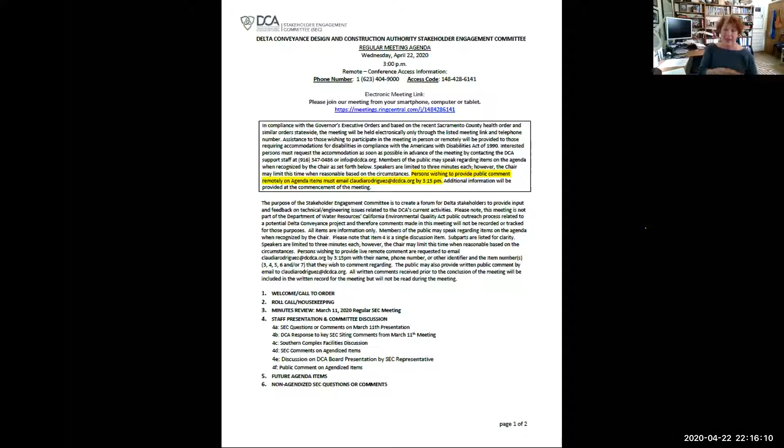Okay. So if we get consensus on leaving the agenda as is, I'm assuming we do, unless I hear anything other, then let us ask, and also just as housekeeping, normally around this time I say the bathroom is that way and the exit is that way, but I think you guys know where that all is better than I do, so we'll leave that.

At any rate, I'll ask Carrie to address the timing of the CEQA process and the related engineering design. So Carrie, take it away.

Hi, can everybody hear me? Yes. So I guess I'd like to start by just saying it's good to see everyone, even remotely, and I hope that all of you and all of your families are staying healthy.

To start this, I'd like to just go over a quick environmental update. The scoping period closed last Friday, and we have started to work to process the nearly 800 comments that we received. Our next step is to develop the scoping summary report, which will summarize the feedback and provide copies of all of the comments received. We plan to post this report on our website when it's finished in about 2 months.

Another issue I wanted to touch on: Director Nemeth, Secretary Crowfoot and Governor Newsom received a number of letters requesting that planning or public outreach efforts for Delta conveyance pause during the COVID-19 pandemic. They have indicated that it is important to them to continue critical water planning efforts during this time, including Delta conveyance. However, they also understand the difficulties of public interaction during this sensitive time and that staying healthy is everyone's priority. The public health situation is pushing us to be more creative in our public involvement efforts.

We know that all methods of reaching the public are likely to be difficult for some people, so we're trying to use a broad range of options to reach as many people as possible. It is our hope that these methods will help improve communications and open new avenues for engagement. The next opportunity for formal review and comment on CEQA is unlikely to be sooner than early 2021, and in the meantime, we're open to your public engagement ideas, and we'd welcome your input.

Glanville. So there was quite a bit of discussion on what it is that we leave behind from these sites. So I wanted, do I have this? Yeah, okay, sorry about that. Okay, so I wanted to start with Glanville Tract as an example of the discussion. This is one of the major sites, and hopefully this provides some food for thought on some follow-up work that we'll do in the next meeting. So this slide here shows the full utilization of the Glanville Tract. If you recall, this is a launch shaft site.

And we selected this site because of its proximity to a rail spur. And by using that rail, we're going to be able to get the tunnel liner segment traffic off of I-5, and we'll be able to use it to move RTM material around the Delta. So we really liked the reduced effects of this site. And then the launch shaft was on the other side of I-5, and we had the idea of a conveyor to link the RTM production from the launch site over to the Glanville site, where we could process it, sample it, dry it, and stockpile it. And a lot of that material will swing to the south down to the southern forebay to help build up the embankments.

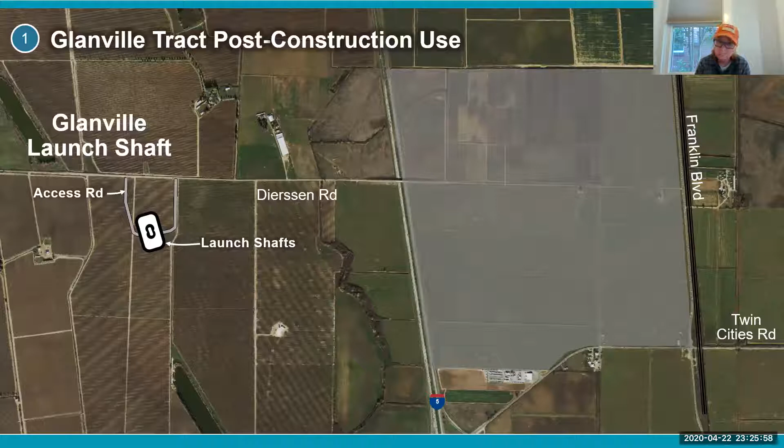Okay, all right. Just one more thing: I think the entry point of the Delta would be Freeport, near the Cosumnes.

I'm sorry, I think you broke up there. Can you? Cosumnes, yeah. Okay. Okay, good. And I see that Dr. Lytle is here. So Mike, have you been able to come up? Mike. Okay, so we're gonna go to Dr. Lytle, and then Anna.

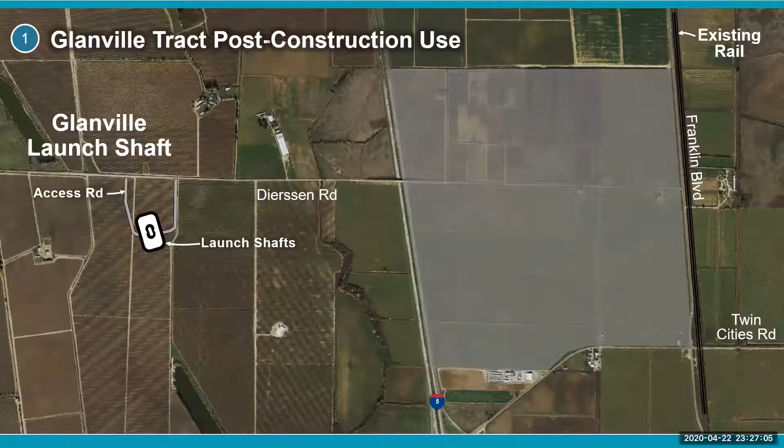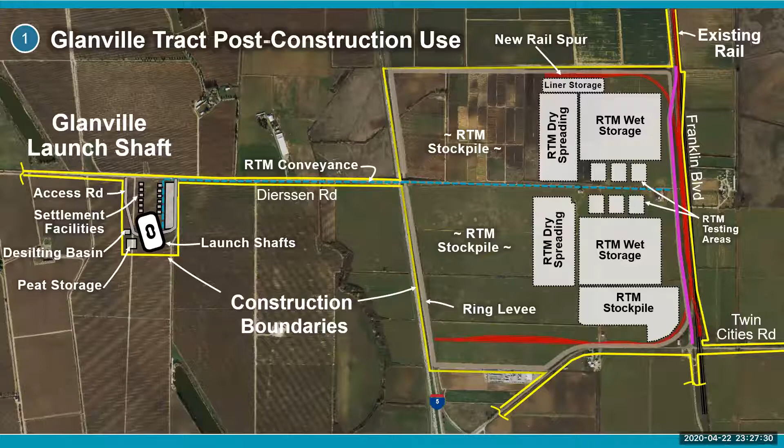Good afternoon. Just one question regarding this Franklin Boulevard site. I'm just wondering if you've been able to determine how you're going to accommodate flood control risk for that property, particularly along the Twin Cities Road over I-5 and further to the west. Yeah, if we go back to this slide here, you see the ring levee around the perimeter. Okay. And just so you know, during the 1986 flood, I-5 at that location flooded. Big time. Okay. And then Anna.

So as we know, the Delta Protection Commission is working on the National Heritage Area, and I feel concerned that they are not being consulted or made a priority on decisions like visitor centers, since that sounds very much like what the heritage area has been assigned as duties. So my suggestion is that we don't live in a bubble and we realize that there's other things happening in the Delta that coincide with the planning of this project, and that we should really be making sure that it aligns with things that they have planned. Wouldn't it be silly to have two visitor centers on top of each other because you didn't talk to the agency that is overseeing it? Thank you.

Okay. I'm going to try to keep pushing through here. Maybe try to hold questions to the end on some of these. Maybe take one or two on each side if we could, if we can get through this just a little bit faster. I know we got a long agenda here. And I think the star of the show is really going to be the southern facilities. We got a lot of feedback at the last meeting about the use of Hood Franklin Road.

So we went back, and what we are proposing here is to use Hood Franklin Road for the alternative that uses intakes 2 and 3. If you recall, at the 6,000 CFS, which is the proposed project in the NOP, we'll need 2 intakes, and that means intakes 2 and 3 or 3 and 5. So based on the proximity of each of these, we've presented an option to use Lambert Road exclusively for the 3 and 5 option, and then use Hood Franklin for the intakes 2 and 3 alternative. And that's really just to reduce the amount of additional haul road that we need to run from Lambert up to 2 and 3.

So here's an alternative that pushes the construction traffic to the intake sites through Lambert Road. And what you're seeing on this map is the overlay of Stone Lakes National Refuge into the area. So this is reflecting comments that we got on the use of Hood Franklin. Any questions? Yeah, I have my hand up. John has his hand up, yes.

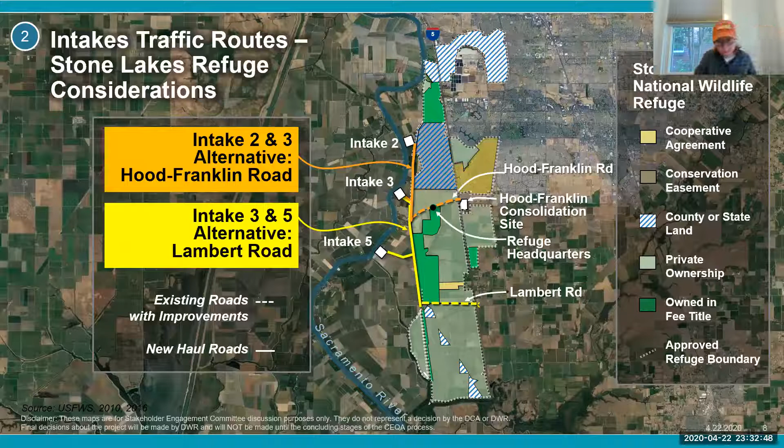Yeah, I think that you covered it pretty well, Catherine. Just as a reminder, none of this is done yet for this phase of the project, but we did consider the idea that if we want to use any of this for tidal marsh habitat, that corner that's on the San Joaquin is what we could use to mitigate effects elsewhere. The rest of the island, based on fish presence, we couldn't move that to another part. It would need to be on the San Joaquin.

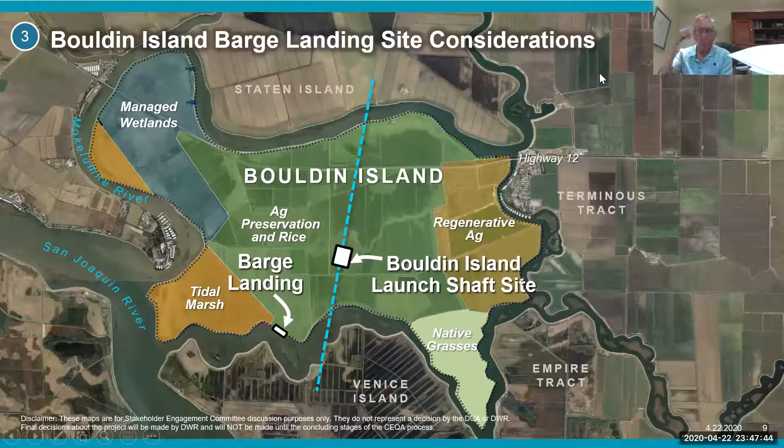Would love to. At the last meeting, there were lots of comments on bridges being raised in the Delta, and just like you all, I've been sitting behind a bridge waiting 45 minutes for it to go up and down before driving off. So this map shows, for the central alignment, the Bouldin Island barge landing. And for the eastern alignment, we have a barge landing down at the lower Roberts Tract. Maybe you remember that from our last meeting in March.

So the three areas where we could conceivably be purchasing the concrete liners from are the East Bay area, the Port of Stockton, and potentially from Port of West Sacramento. All of those areas have existing concrete batch plants that could facilitate the volume we would need. You can see you can get to both landings to deliver the liner material from both the East Bay area and Port of Stockton.

But if the contract was awarded to a firm up along the Port of West Sacramento, you have the Rio Vista Bridge and then the 3 Mile Slough Bridge that would open up on that route to get to Bouldin. There is an option, not shown here, where if it came from West Sac, there's no avoiding the Rio Vista Bridge, but you could go around Sherman Island before you got into the barge landings on the two islands. So I just wanted to present this to you in terms of bridge impacts from the liner fabrication location.

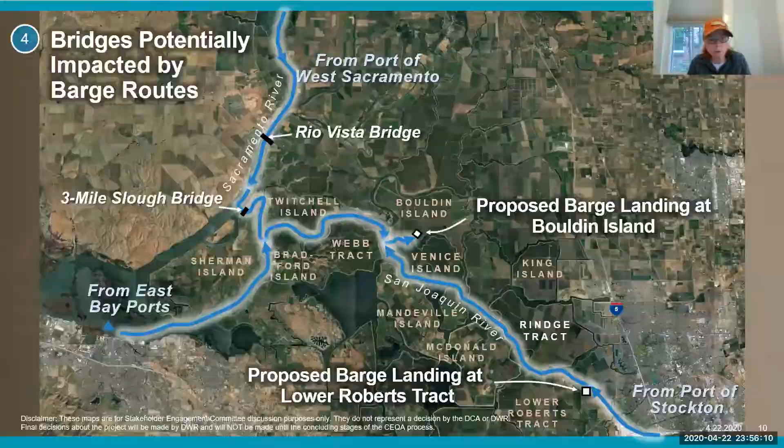Next slide. There was a lot of conversation at the last meeting about where we had sited the shaft on Staten Island. This is a maintenance shaft, so it's one of the smaller sites. It's not like Glanville — there's no RTM produced here. This is a place where the contractor can go down and do routine maintenance on the TBM machine. Consider it like a car tune-up so that it can make the last 5 miles to Bouldin Island.

And where we had located it was on a narrower dimension of the island. Sean pointed out that it would be much better to locate it in a wider area of the island. I'm no bird expert, Sean is, and maybe he can speak to the species, but working with some folks that understand these issues, there was a request to move it. We moved it further north, right along the road, to keep the impact close to the road and in a much wider section of the island.

Sean, I don't know if you want to speak to this at all. Is that the location that I sent you? It is. So the benefit of this location is not only is it in a wider part of the island, but it's right next to a developed area. There's a house there, and that house has some power lines. So it would be the least evil place to put it on the island in terms of impact on cranes. Thanks, Sean. All right, I think least evil is a good way to describe that.

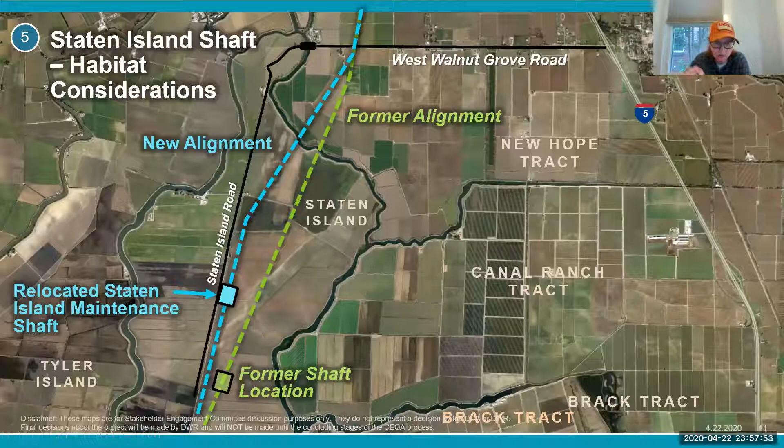Okay, great. And again, this shaft is only on the central alignment. It's not on the eastern alignment.

Then the last slide before we get into the southern facilities, there's been a lot of conversation around the impact to recreational facilities. I don't have much to add to it, but what I wanted to do was take the recreational map that we gave you and overlay the alignment, both the central and the east. You can see it on this map. The circles are used to highlight the names of all the different facilities that are included in the alignment. By overlaying this with the transportation, you can start to formulate in your own mind some of the impact that the construction or the traffic to get to these sites might have on either access or noise or aesthetics to some of the recreational areas in the Delta. Again, I don't have anything to speak to it, but I wanted to make this map available to you.

If anyone wants a full-size print or an 11 by 17 print, we're glad to run into the office and make copies and mail them to your house. All you have to do is send in to Jasmine a request for it. And if there's any maps in general that you'd like to see the overlay of the facilities on, we'd be glad to produce those for you. This one might be a real nice one to add to our big book of maps, kind of pull this stuff together.

Yeah, we do have the rec map as one of the GIS maps that we provided very early on, and then we supplemented it as we added some additional recreational facilities. But what we hadn't done is layer the actual sites on top of any of these GIS maps. So I thought I would tee off that conversation here and start with this recreational one, because it is the one that's brought up quite frequently in these meetings.

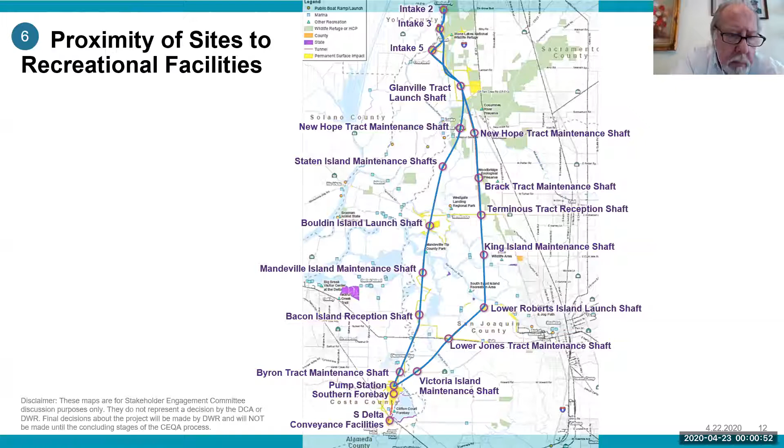Karen is... Yes, this is the recreational facilities map. Yes, this. I'm not seeing the Mildred Island Anchorage area noted. I'm not seeing the local elementary school, which is within a stone's throw. And Catherine knows that I'm very, very concerned, and I can't blow up these maps enough. So yes, whatever I can get in terms of maps, I'd really appreciate.

Yeah, we don't have the school on here. These were recreational facilities. Well, the school's kind of important. I don't know if my grandkids would say that's recreation, but it is for me to get them out of the house, but that's beside the point.

Yeah, anyway, so I see the recreation areas, but you need to be aware that the entire, the only way in and out of Discovery Bay is through that river that this goes right under. And so that's an issue.

Okay, I know that next meeting's maps will be blown up for each one of these sites, so hopefully it'll be a lot easier for you to see some of those. If there's any recreational comments you have on this, again, just send them into Jasmine. Feel free to copy Karen Askin, and she'll double check that she got them. I think she said that she had picked up your comments from the last time and incorporated them in here, so I apologize if we're missing some things still.

And then what we can do in terms of, I think the map with the schools on it is cultural facilities. Is that right? I can't remember, Karen. No, that would be, it was kind of described as a sensitive receptors one originally. Okay, we were the schools, medical facilities, hospitals, fire, safety. Okay, so we can do another blow up map for that one and lay this on that as well. Well, we can do that and send that out to you.

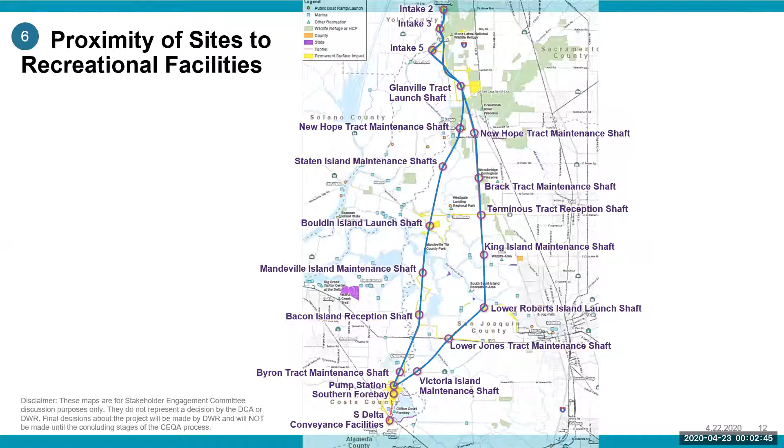So that's the only drinking water that we have for about 15 to 18,000 people, maybe 20. Just FYI. That's kind of okay. Appreciate that. Thank you. All right.

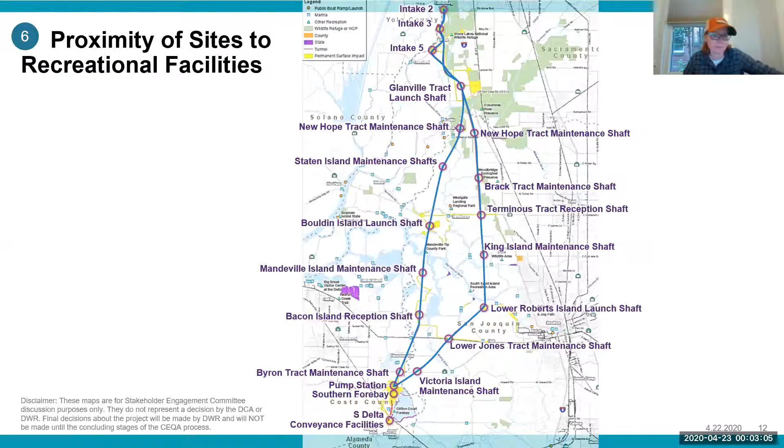That's it for me. Well, and again, there were several comments, and the timing was terrific previously, where people were saying, "What are you doing with our comments? How is it manifesting itself in the actual design?" I hope that this begins to answer that question. I actually think we need to start putting some things in writing a little bit differently. I like the idea of perhaps a matrix that we had heard earlier from Barbara, but hopefully this begins to answer that question. And so moving on to item 4C, Catherine, do you want to?

Yeah, I'll just tee this off. So we've done deep dives into each of the sites. We put things a little bit out of sequence for the March meeting to address some feedback we had from you that you wanted to see the bigger picture. So we did a presentation on the overall site layouts for the entire alignments. And we had skipped over doing the deep dive in the Southern Complex. So we wanted to do that for you. So this will represent the last of the deep dives on the facility locations.

And just as a reminder, in next May's meeting, as we discussed, we'll go into the final proposed maps for each of those individual facilities. So you'll have another chance to take a look at that. But with that, I'm going to hand this over to Phil, who's going to take control of the screen and walk you through the Southern Complex.

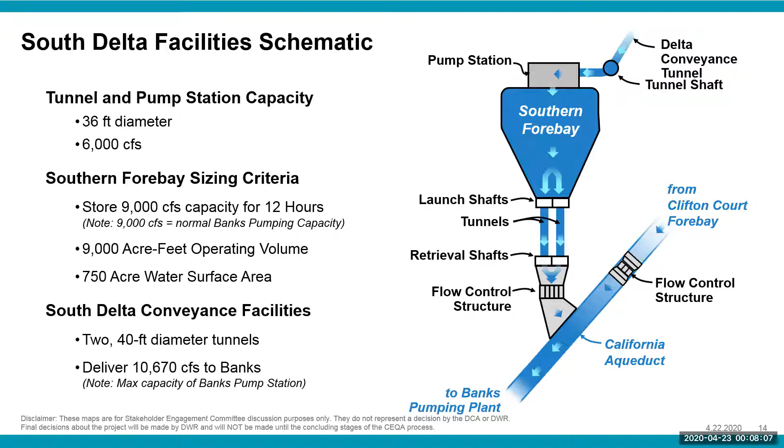So let's go through how we sited the forebay to start with. We basically looked at everywhere we could to site a facility in the vicinity of the delivery points, which is the California Aqueduct there you see in the lower right part of the photo. We even looked at opportunities to split the reservoir into a couple of pieces to make sure we checked out all the basic land areas in the area.

So I'm going to go into a little bit deeper dive on the various parts of it. We've divided it up into 3 pieces here. The northern part is basically the pumping plant area, which is site A there. B is mainly the forebay area, and then C is the area across the Byron Highway where the flow control structures are. You can see that A and B together are pretty large sites. They're almost 2,000 acres of constructed area.

And with the 750 acre forebay, that's just the water surface, not considering the size of embankments and some of the other permanent facilities like what I'll show you in a minute. The final site is about 1,275 acres. Then as you get down to the tunnels, the tunnels are about 8,000 feet long each. As they end down there in area C, you can see that the construction site's about 180 acres, and the final project site's about 120.

So starting up in area A, you can see the pumping plant. The two different tunnel alignments are shown in blue as they come in from the right there. And this is sort of a schematic view. You don't really see the tunnel shaft, which I'll show you in a minute. So we're going to take some of the topsoil and stockpile it up there on the top end, and then some of the RTM that ends up left over. The RTM balance is such that we're trying to build the forebay, so we may end up with a little bit of excess RTM that we'll stockpile in that area.

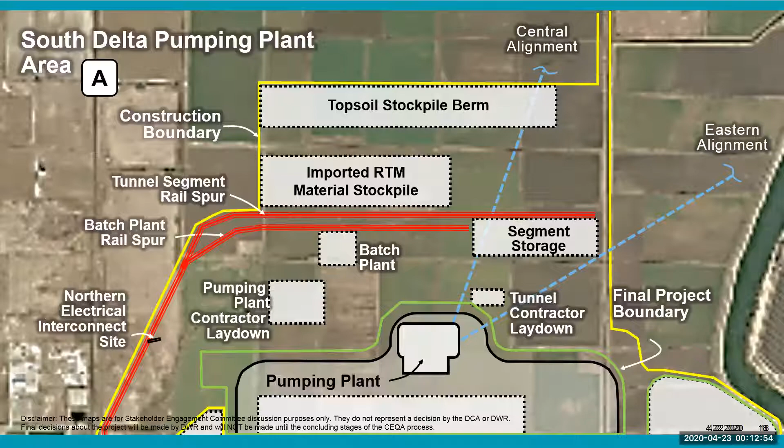So then moving down, well, now I thought we were going to move down, but I guess no, we're going to go through the pump station. So here's the site of the pump station. This is a graphical rendering of what it might look like. You can see the pump station building itself there, and some of the support features.

There's an electrical building appended onto the back, and actually what the arrow is pointing to, those blue things with white on them, are big air conditioning units for the electrical gear. And then in the back there'll be the electrical substation to feed the electric motors that run the pumps. And then there's the office building, and then equipment storage and shops.

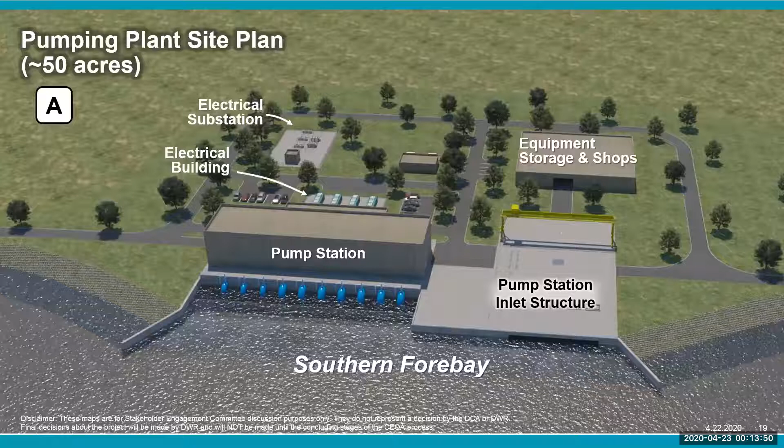And then the big light gray thing where the inlet structure is called out there with the crane over it, that's the tunnel shaft that we use to transfer the water into the pump station, and also to be able to overflow out into the forebay area. Give you a little bit more detail on that.

So here's the same rendering from an angle with some cuts put through it. You can see the crane there kind of in the upper right. It's tan there, it got cut in half because that's where the slice goes. So that's the tunnel shaft on the very right there. And water would flow out of the tunnel shaft through that rectangular opening, and you can see the arrows going across the floor of the rectangular opening. And then they enter the wet well of the pump station down there.

So the water would flood into the bottom of that wet well, and then you can see the pump columns with the inlet bells down at the bottom. They hang inside a cylindrical well, so it's similar to a well you'd see in agriculture, but these are pretty big, obviously, because these are big pumps. So the water would flow down that well and then up through the bell.

And then over on the left here, you could see where it would come up through the pump and out behind this. We have a level control weir well to control, it's kind of a techno geeky thing about how to control the discharge head on the pumps that you have to have to make the pumps function properly. And then that would mostly be submerged, and then that would flow into the southern forebay there where you see the arrows.

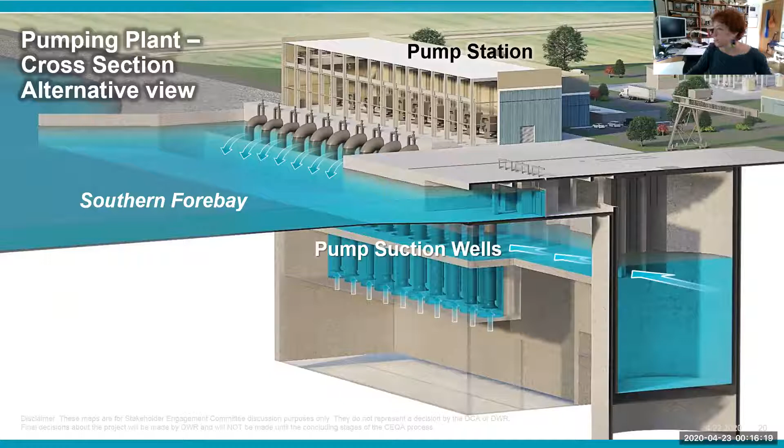And then this gantry crane over the tunnel shaft is there in order to be able to isolate the pump station from the tunnel system for maintenance and safety of workers. There'd be large gates that would be slid down into those slots you can see just to the left of the crane on the surface there. And also this crane could be used to lower a temporary pump if we ever had to dewater the tunnel. A large pump would be lowered down using that crane and then pump the tunnel out into the forebay.

So that was area A. So now we are moving on to area B. Again, the southern forebay area. One thing I forgot to point out, the areas in green are the permanent facility boundaries, and the areas in yellow are the construction boundaries.

And this drawing is a little bit complicated. There's a couple areas circled in yellow. Those are areas that we're not going to touch at all. So they're circles inside the outer yellow areas. And that's primarily because they're underneath a large power corridor there.

So here's a more detailed layout of the work site for the forebay itself. You can see the embankment's kind of been shown just with the black line for simplicity. So the concept here is that we'll have RTM coming out of the tunnel, and that's the area in the north for RTM treatment for drying and processing.

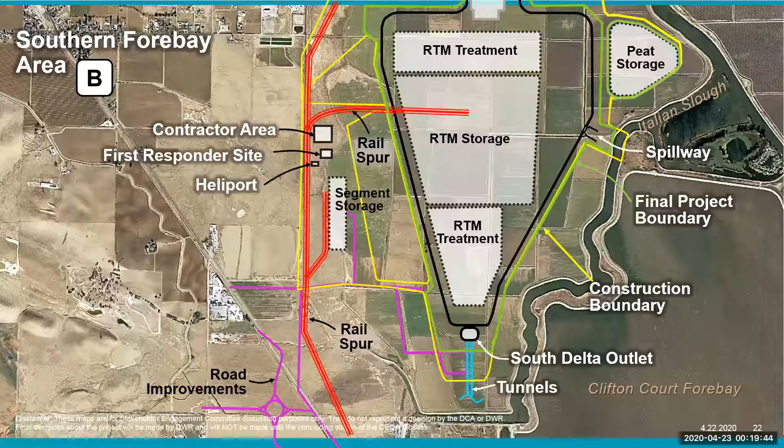So beginning on the internal side, we've got typical foundation, natural ground elevations out there between about -8 and +2 feet elevation. As Phil already described, we've got a maximum normal operating water surface of elevation 17.5. And so that's, again, referencing back to what Phil was talking about, that's the top of that normal operating band. Above that water surface, we have 3.5 feet for wind and wave run up.

So this is a pretty broad, flat reservoir. We could get some wind that could push waves and develop waves. And so we want to make sure we've got enough height of embankment above the water surface to make sure that waves don't splash up and over and out of the spillway. That also provides what's called freeboard, which is essentially the same purpose, to provide that extra embankment height above the normal water surface elevation.

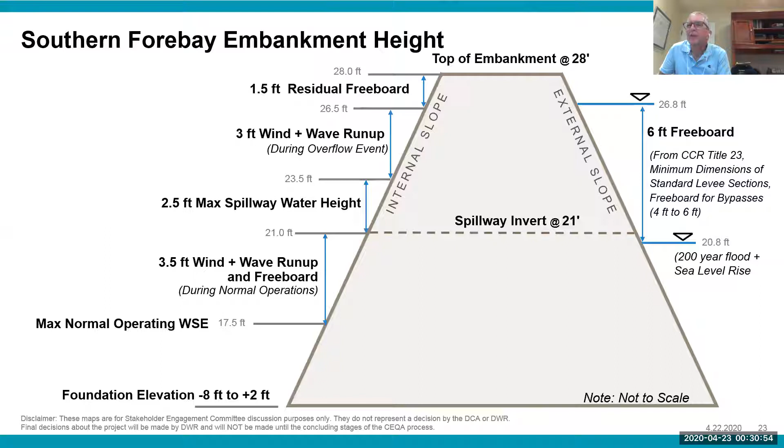David. Yes, I'm really glad to see that you've been dealing with Italian Slough there, and that this is actually going to be flowing in there. I mentioned in the last meeting that I'd like to promote this as a dual benefit facility. And I've mentioned this to Carrie. I really think that with the issues going on with algae and health issues with the water down there in the South Delta, there's a benefit to be able to take some of this water and flush it back into the Delta during times when there's problems and issues.

And have you thought about other plumbing? I'm sure there's a better way to do it than out over a spillway. Would there just be a flow control device needed on one of the forebays into Italian Slough? And Carrie, are you planning to look at this as part of the CEQA process?

So I know that everyone loves when I give this answer, but we're just not quite there yet. When we were talking about it, we were considering it as a mitigation measure, but we haven't got to the point yet where we know what kind of mitigation measures we need. So I need to get a little bit further down the road. I think we could certainly brainstorm with Graham ways that we could look at it, but in terms of whether we would incorporate it as mitigation, we're a little bit away from that still.

There was a lawyer that spoke to me a week ago or so, and I haven't done a lot of the research, but he indicated to me that the water in those forebays is actually considered part of the Delta until it's pumped into the aqueduct. And some law in 1986 or something said that water can only be pumped out if it's of a nature that won't affect the Delta.

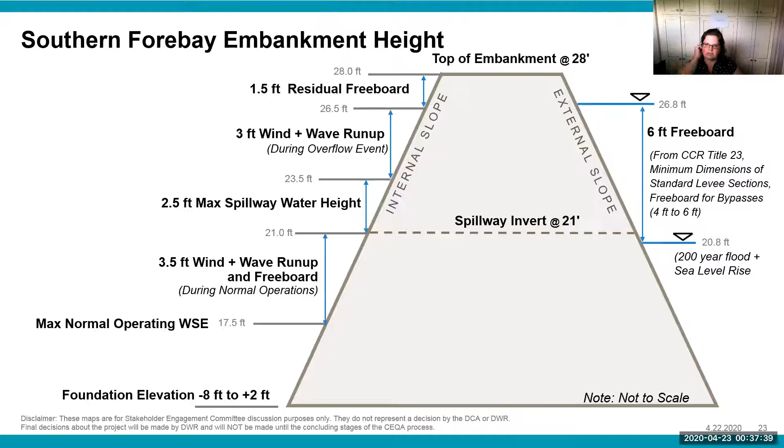One, do we know what the ongoing noise would be from operations of this pump station on the surrounding communities? I know there are houses around here because our dear friend Suzanne Womack is one of the people who will suffer most from this southern portion. I'd like to see a map that really details what the houses look like and where they are in relation to this.

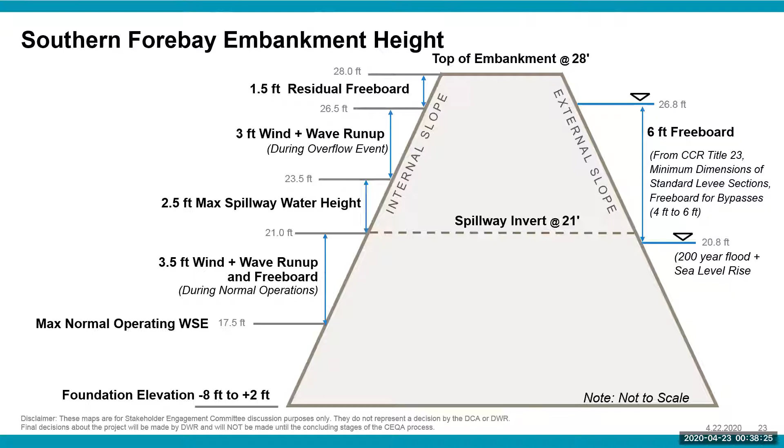Great. All right, Mike. Mike, you're muted.

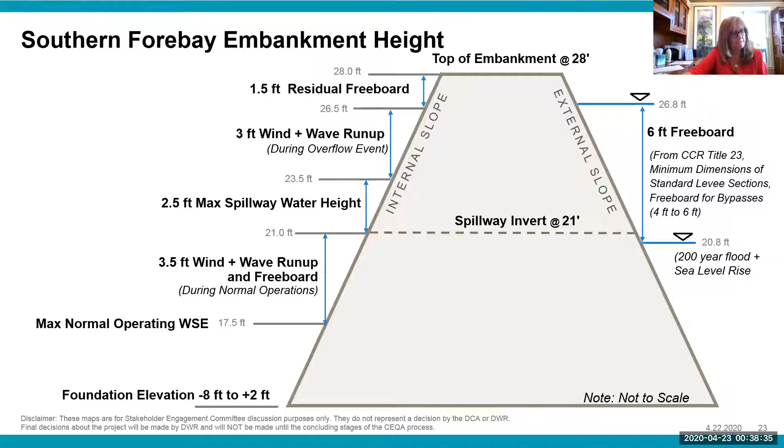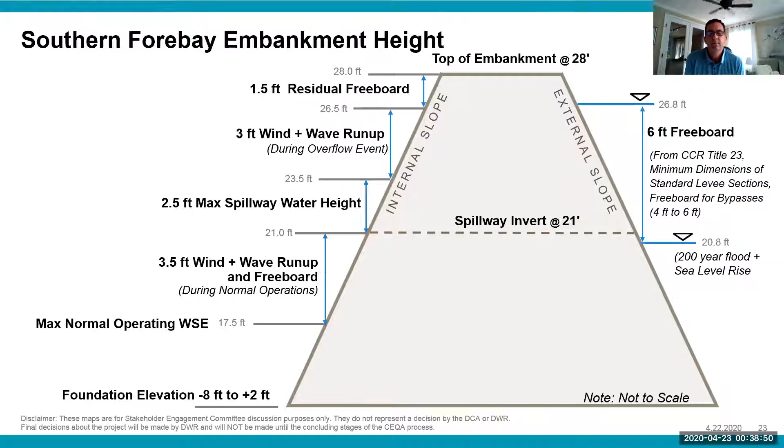So this is a typical cross-section of the embankment. It is an earth-fill embankment. The intention would be to use RTM for construction of this embankment, so long as it meets the specifications for embankment material. It would be constructed with 4-to-1 side slopes on the interior and exterior, with top elevation set at elevation 28. By comparison, on the scale to the right you can see approximately where the max water surface elevation would sit, at 17.5.

A couple other key features here: the interior slope would be lined with riprap to protect against wave damage and erosion of the slope. We've got a fine grain cutoff wall through the center of the embankment and down into the foundation. This is a seepage cutoff wall, a soil mixed with clay, which is a soil bentonite cutoff wall, and then a fine grain cap above that to complete the cutoff through the embankment.

This would extend down to a depth that really keys into a fine grain layer at this point, until we get a lot more site-specific geotechnical information. We don't know exactly what depths that wall is going to need to extend down to, but the intention would be for it to key into an underlying deeper fine grain layer and complete that cutoff. That cutoff wall surrounds the full perimeter of the reservoir, so it's a full ring of cutoff wall.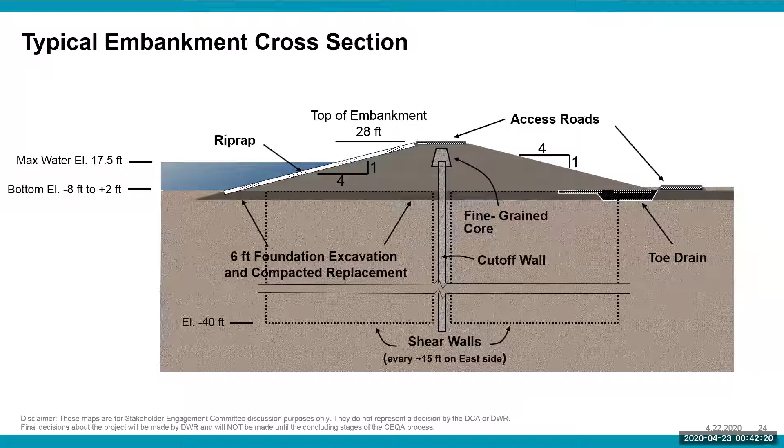Okay, so moving ahead now to Area C, which is the other side of the Byron Highway on the downstream side of the dual tunnels.

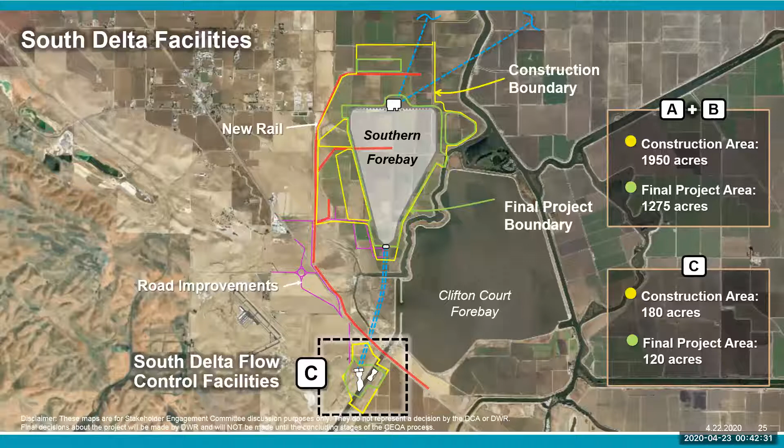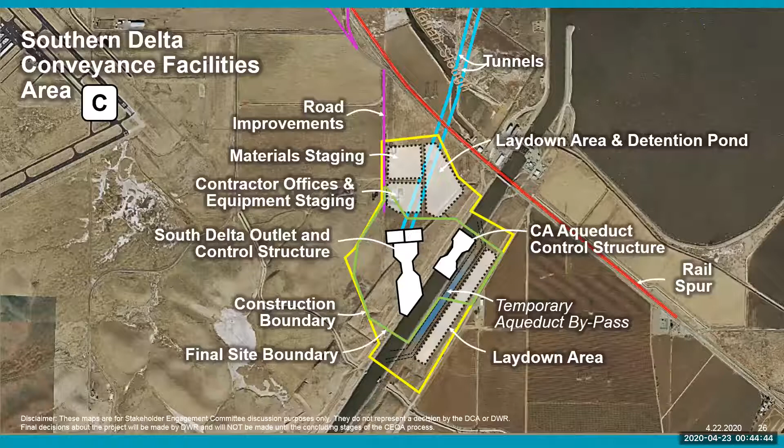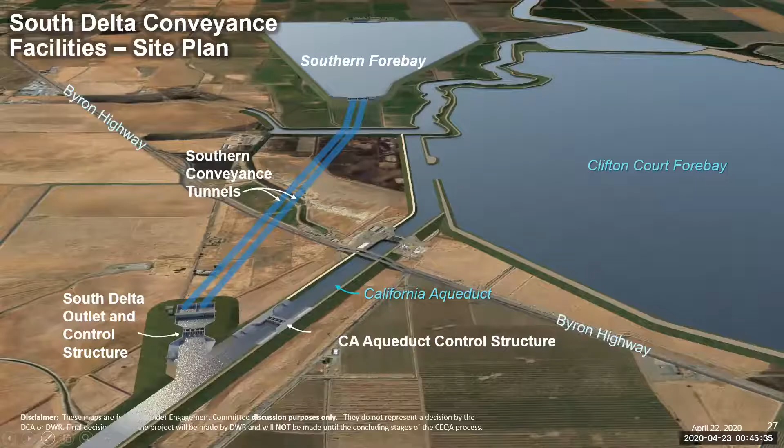Like Catherine mentioned, we have a summary of the truck trips we expect. In the early part of the work, we're basically building the roads, rail, and access facilities to get there, so there's a lesser amount of truck trips supporting that. But once we get into the earthwork and ground improvement for the reservoir and the pump station pads and start tunneling, we're going to have more truck trips per day.

Plus there will be about 4 trains per day during the main tunneling period. Those trains would be hauling in tunnel segments, one a day bringing RTM from up north, and about one a day hauling cement and aggregates. That's the peak load during that period; it's really going to average about 2 trains a day, because we won't have all of that coming at once — the cement and aggregates will be busy when we're building diaphragm walls for tunnel shafts and the pump station. The tunnel segments will have more trips when we're trying to keep the storage area on site full, and they'll average out, with the RTM probably pretty steady through that.

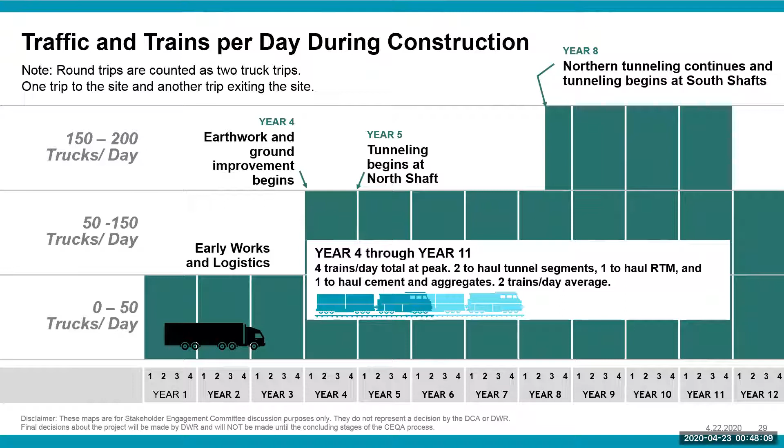And then as the north tunnel picks up, you can see the truck trips pick up quite a bit for a few years there while all the construction is going on at once during that period of time.

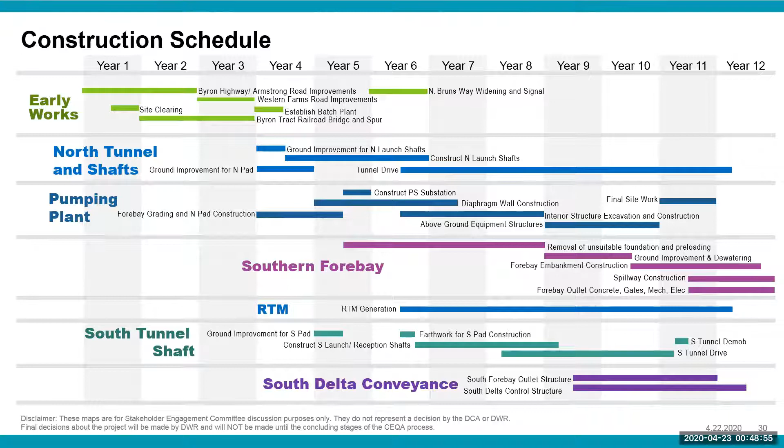With that, I'm going to have to make a switch here in my presentation to show you a little animation. We'll see how this goes — bear with me for a second.

So you've got that view, but I got to get my controller view up as well.

Okay. So what we have here is an animation that's going to show you what happens at this site through the 12 years of construction. And every time I click, you'll see the years across the top, 1 through 12. We've kind of programmed this for every quarter because everything's changed, but I really don't want to drag you through 48 clicks. So every time I click, you're going to see 4 quarters peel off on the screen in front of you. So I'll give you an example.

In year 1, you can see it click through 4 quarters, and we got out there and started building the roads so that the traffic on the Byron Highway can be moved around the work site. And then as we click through year 2, those roads are getting completed and the rail sidings are in and being brought up to the site. Year 3, we start to build the on-site roads, we start to clear the areas for our work areas, and we start to use some of the material there to start doing the ground improvement at the pump station pad, because that's going to be the first place we place fill.

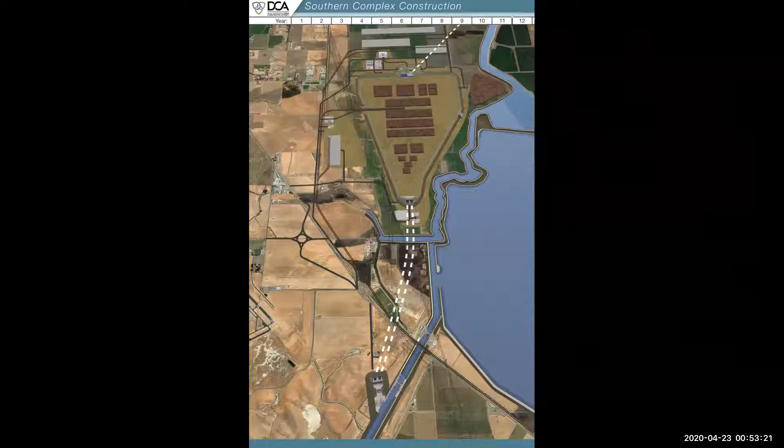Year 11, the tunnels are completed. The structures are mostly complete in the south. They were working on the structure in the south while they're driving the second tunnel because it's just a reception shaft, so they just have to be able to remove the tunnel boring machine. You can see the embankments are starting to take more shape. The spillway is in place. And then the last year, we clean everything up, finish all the work, and commission the facility.

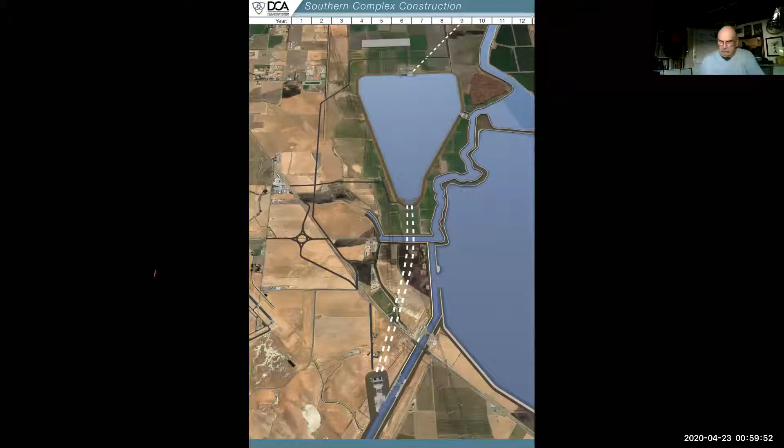And I would also like to ask, when you're talking about truck trips, are you including those that are hauling borrow fill? We're planning to bring the RTM in by rail. Oh, okay.

Thank you. Awesome. Barbara. So in WaterFix, it was estimated that the existing pumps would be used without tunnel operations 52% of the time. I know you're not going to give me an answer about that because you're going to work operations through the EIR. But what I'm curious about is with all this major work that has to go on at Clifton Court, isn't this the opportunity to go back to CalFed and fix the fish screens for when you use the existing pumps? I mean, to me, it just seems like you guys should engineer it in. We can all fight about it later, but I just think there's so much opportunity there to improve that set of conditions at the same time for fisheries.

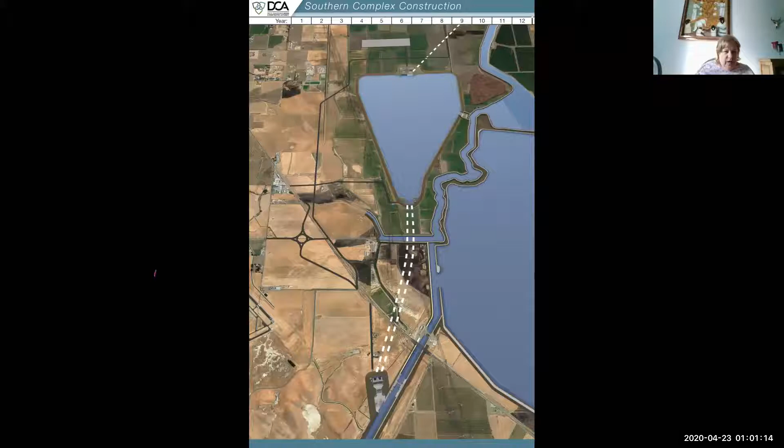I would leave it to Carrie, but I'm pretty sure I know what she's saying. She can correct me, but that is being considered as a separate project that DWR is evaluating. Yeah, and that's something that's important to State Water Project operations in general. So it's under consideration as a separate effort. Good. Would it be, just sorry, would it be incorporated though with construction at this time, or you're just running it as a separate? No, at this point it's a separate project. Okay, good to know. Thank you.

All right, Douglas and then Jim Cox. Douglas, we can't hear you. You are muted. Douglas, you're still muted. Hi. There you go. Hi, you hear me? We can hear you. Yep, we're good.

Okay. Actually, Barbara and I are both interested in the fish screen because I read that Clifton Forebay, they have a non-performing fish screen killing all the smelts. I'm more interested in why cannot they fix it, remedy it? Can you hear me? Yes. So, hi, this is Carrie. So there are a number of alternatives being studied for how to address Clifton Court Forebay fish protection, and I don't know that it's that they can't come up with an option, but I just think the study is in progress to try to determine how best to manage that.

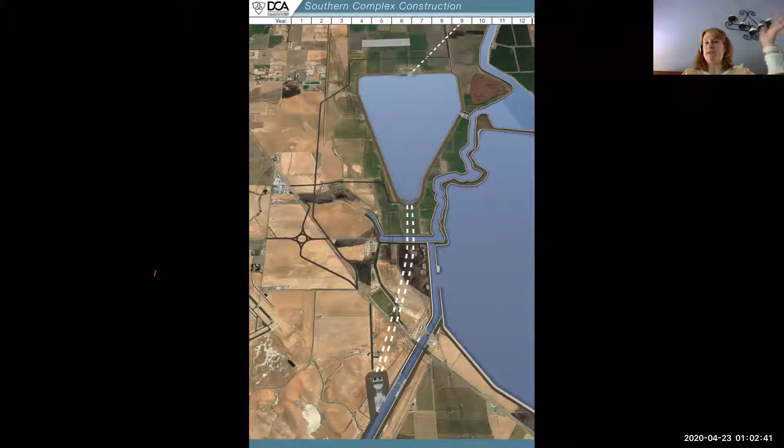And I'm sure that for our southern forebay, we won't have that problem. Well, our fish screens won't be in the south, so by the time the water reaches the southern forebay, it will already be screened because it's screened at the intakes on the Sacramento River. That's right. Thank you. All right, thanks. Jim Cox, and then Cece wants to say something again.

Jim? Well, Barbara and Douglas pretty much covered a lot of what I wanted to say, but I really feel that this should be incorporated into this project, not be a separate project. This has been delayed and stalled for years. And fishermen have gotten to the point where we just don't believe anything that's said about this because we've heard so many promises in the past. But I just want you to keep in mind that Clifton Court is the biggest fish killing spot in the Delta. And once fish get into Clifton Court, they don't get out. The flows just keep them in there. The predation keeps them in there.

And so it's something that really needs to be addressed. And I can't emphasize it more. And I feel when you have a project that part of the demand is an improvement in habitat, this would be the biggest habitat improvement you could do in the Delta. Okay. Great comment.

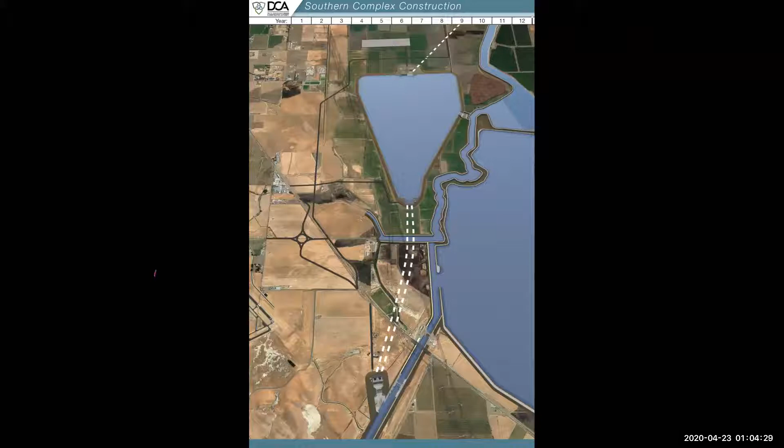Cece, can we hear you? I just had a question. Where does the borrow come from? The RTM is generated from the tunnel drive way up in the north at the Glanville Shaft and the Twin Cities processing center there at Twin Cities Road and the freeway. There's two tunnel drives, one north towards the intakes and one south. I mean, clay to mix with the fines.

Yeah, the on-site. He's gonna dig that out of the floor of the forebay. That's right. Grading of the floor of the forebay, as well as we have to excavate out the upper 6 feet of the foundation underneath the embankments. And so also that material, where it's suitable, will provide that borrow.

Thank you. All right. And as we wrap up 4D, SEC comments on agendized items, do we have any other questions or comments or discussion items on the agendized items? All right.

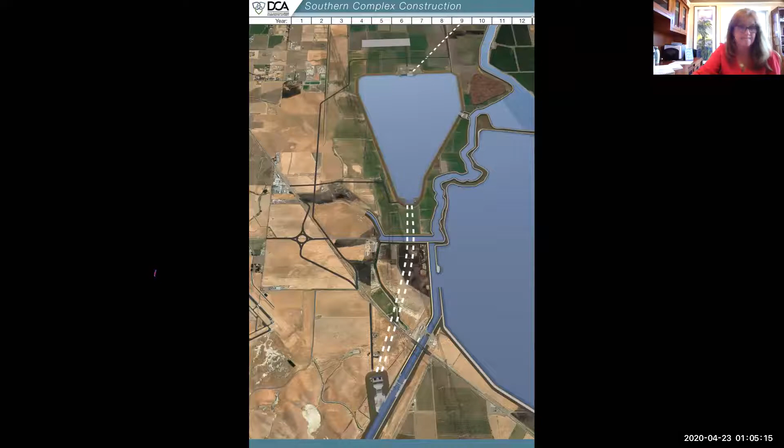Sarah, do you want to introduce Catherine for 4E? Yes, Catherine, you're going to continue on with 4E in terms of your discussion on the DCA board presentation by the SEC representatives. Yeah, so when we started this process, there was a commitment to allow a representative member of the SEC committee to do a report out to the DCA board to make that connection between this SEC process and the DCA board.

For those familiar with the DCA board, that's made up of representative board members of three of the state water contractors. There's 2 representatives from Metropolitan. You all know Sarah, she's a representative of Zone 7's board. And then Tony Estremera, the director, who is from Santa Clara Valley.

So I think that we're at a point in this process where I wanted to open this up for comment to you all of having a member of the committee do a presentation report out to the DCA board. I'm proposing that it's a rotation so that it's not just one person doing it at each one of our board meetings. We would rotate it and we can go through random selection.

You can nominate somebody, but the original point of that SEC member report out to the DCA board meeting was to make sure that the board members heard directly from the SEC on their thoughts on the process, if they had any recommendations to change it, and general findings around effects on the project and how those might be reduced through engineering, really trying to stick to the scope that we're in. So I wanted to throw that out as an offer to start that at our next board meeting.